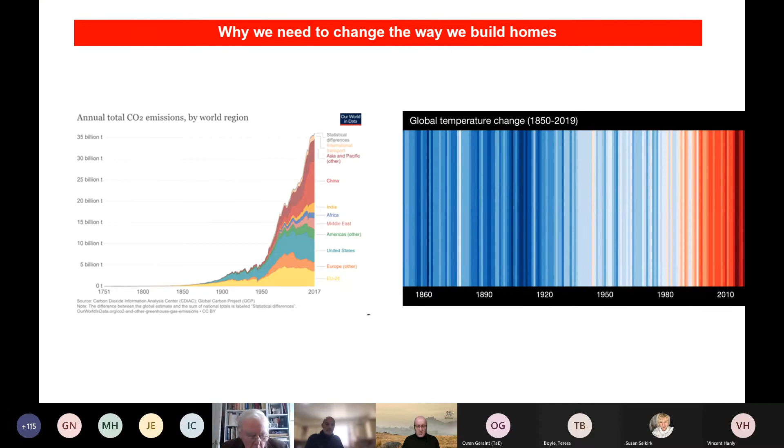So what action has the Welsh Government undertaken? To start off with, the Innovative Housing Programme has run for a number of years. Welsh Government have funded 64 schemes, resulting in the construction of just under 2,000 homes. 85% of those homes are constructed from timber, and just under 50% of them use Welsh timber.

We are about to publish new guidance on design requirements for social housing. It has been called Beautiful Homes and Spaces, though I'm not sure if that will be the final title. Within that document, we will be requiring or encouraging social landlords to account for the upfront carbon involved in construction, and encouraging them to use recycled materials.

Welsh Government also hold the purse strings in terms of grant conditions. In a short period of time, we will first encourage landlords to undertake lifetime carbon assessments of the homes they develop. Then in a few years' time, we will require social landlords to produce lifetime carbon assessments. And at some point yet to be determined, we will introduce limits on the levels of upfront carbon in construction for social housing purposes.

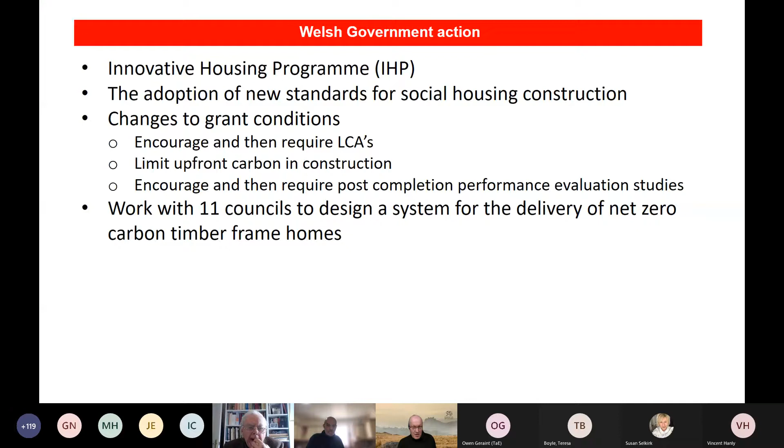I'm going to talk specifically now for the rest of this presentation about the piece of work we're running through with 11 local authorities and a small number of housing associations on the design and delivery of a system for producing net zero carbon timber framed homes. This work comes out of the Council Housing Development Forum, where the 11 councils come together to talk, share their experiences and learn.

The project builds on the work of the Homegrown Homes project, one specific element of which James will be talking about later. The proposal sees the 11 local authorities and housing associations working together to design a net zero carbon timber framed housing solution, effectively forming a buyers club to create scale of orders, and providing an opportunity for councils to upskill their DSOs to safely erect and fit out homes, or to work in partnership with locally based SMEs.

The project was supported by the 11 local authorities in October, and Powys County Council made a successful application for innovation funding to support the first stage of the project. That first stage sees the design of a short terrace of 2-bed, 4-person houses to RIBA Stage 4, along with the first iteration of a manual for the manufacture and assembly of the homes.

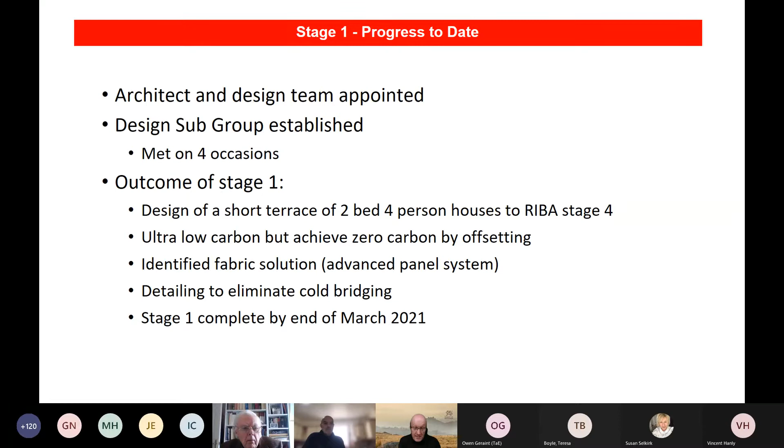This stage of the project will be completed by the end of March. And throughout this process, Rob, the lead architect, has stated we need to engage with manufacturers to ensure that what's being designed is capable of being manufactured. We hopefully address this in stage 2.

Stage 2 will see the design of additional property types that you can obviously read. So we've got 3 property types there, plus the property type currently being designed, the 2-bed, 4-person house. Those 4 property types represent somewhere in the region of just under 80% of the homes that local authorities are going to require over the next 5 years.

So we will be designing the bulk of homes that local authorities wish to develop. We also will be looking to prototype and test the build system, and that testing will focus not just on fire but on structural stability, and also the buildability of the system.

We want stage 2 to secure warranties for the build system. The local authority or the participating social landlords are yet to identify which warranties they would require.

Stage 2 will also see the whole life carbon modelling of the homes, so effectively each home will have its own EPD. And we will see in this stage the development of a manual for the manufacture and assembly of the homes, and we would want to achieve a quality assurance accreditation for that manual.

The most effective way forward, we consider, is by advertising a contract for an innovation partnership supplier, and the supplier will both be designers and manufacturers.

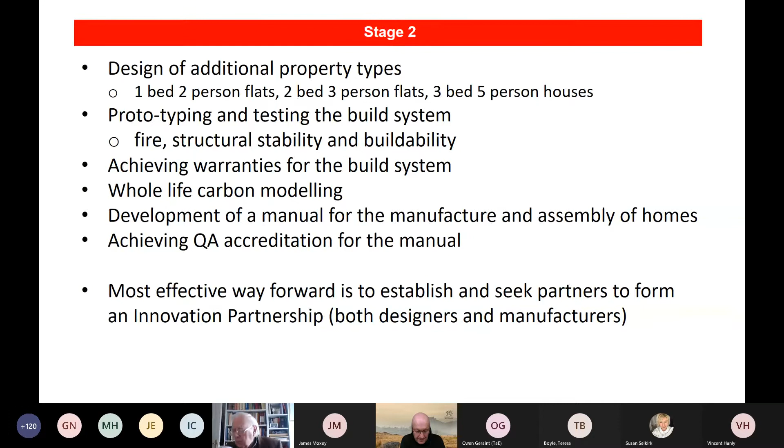So what are the next steps? We will be looking to advertise the opportunity for the Innovation Partnership on Sell to Wales in the late spring, and we're hopeful that we will appoint a supply partner in 2021, in the summer of 2021.

At the same time as the work in preparation for the letting of the Innovation Partnership is ongoing, we are working with Social Business Wales, which is part of the Wales Cooperative Centre, and with a group of timber frame manufacturers and a designer to form a consortium to hopefully bid for and win the Innovation Partnership.

We imagine that the Innovation Partnership will probably take about 12 months, but it may be slightly longer. There are a few Donald Rumsfeld unknown unknowns in relation to fire testing and also the process of securing warranties, which could make it slightly longer than a 12-month period.

But at the end of the Innovation Partnership, we would have expected local authorities and the housing associations who are participating to have identified the volume of homes that they would wish to secure via a further contract, and then look to let a 5-year contract with the manufacturers who are part of this process. Obviously, we would have to let a contract for the supply of those homes.

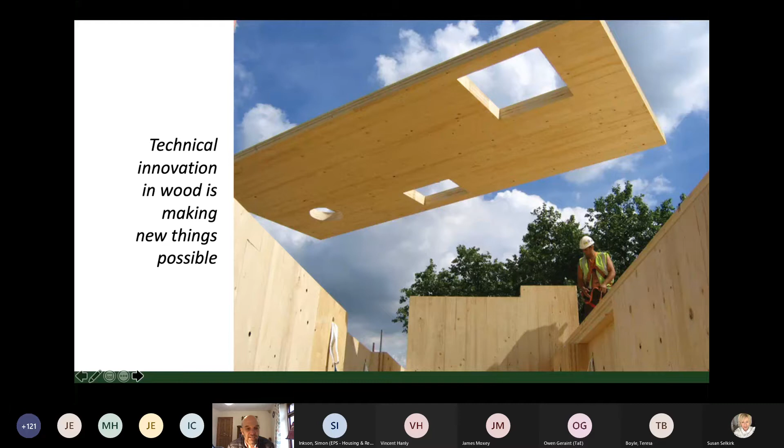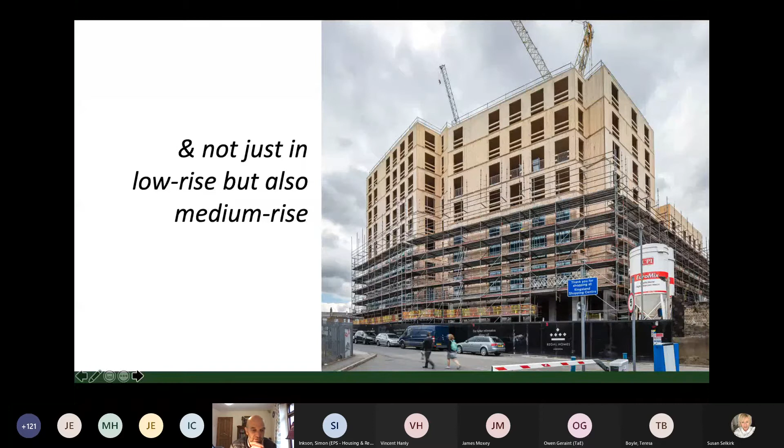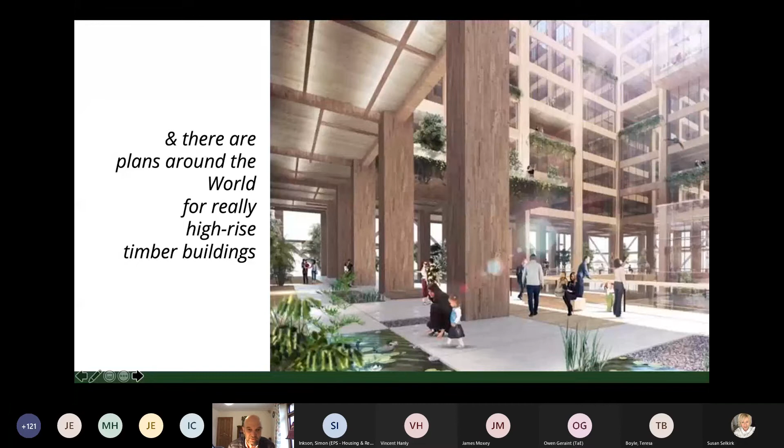The technology and innovation is moving extremely fast. This is CLT, which can be used in low rise, medium rise and high rise. This is a project in London, Dalston Lane, which was at the time the biggest use of cross-laminated timber in the world - I think that's been superseded now. You can also start dreaming of high-rise, although post-Grenfell in the UK that's a bit of a challenge at the moment, but in other countries across the world, they're looking to push the boundaries of what you can do with timber.

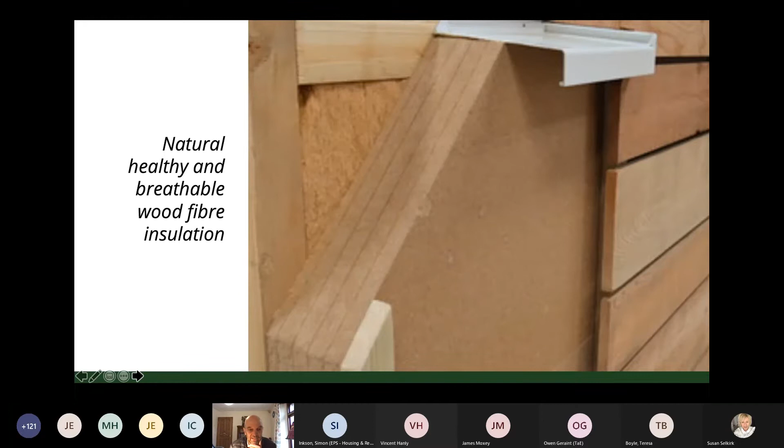There's also wood fibre insulation. After you've produced your sawn wood, the residue can be turned into insulation, and the market for wood fibre insulation has gone ballistic in recent months, given everybody's on a decarbonisation journey. It's become hard to get in the UK because we don't have UK production at the moment.

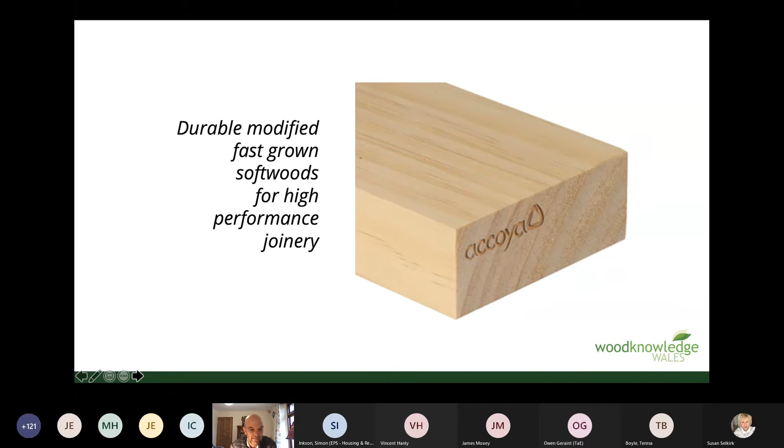And then this is Accoya, which is a fast-grown radiata pine timber, chemically modified to be hydrophobic so that it doesn't move with humidity, and therefore doors don't jam, windows don't rot. It is becoming the go-to timber for joinery in the UK and across the world.

So those are all fantastic recent innovations. So a bit about Wood Knowledge Wales.

Our vision is of Wales as a high-value forest nation, a net zero high-value forest nation. We're not really a forest nation - we're a sheep, beef and dairy nation, and not a timber nation. We're very much a steel nation culturally, so it's a challenge for us in terms of the shift.

Our mission is to support the purposeful development of Wales' forest industries from tree to product, to benefit everybody - the economy in terms of jobs, income and revenue, the environment in terms of afforestation, and of course the people of Wales.

What we do is very much knowledge creation and exchange. We do advocacy and strategic interventions, and we like to think we drive innovation through encouraging collaboration. We're a for-public-good, not-for-profit membership alliance.

These are all our fabulous members - some of you I saw on the delegate list are definitely here. We're growing at about a member a month. Companies join partly because of our value proposition, but also because they believe in the mission.

You can see there that we cover everything from the forest - organisations such as Natural Resources Wales are members - all the way through to the clients: social housing, but also private sector clients as well. So, the Homegrown Homes Project.

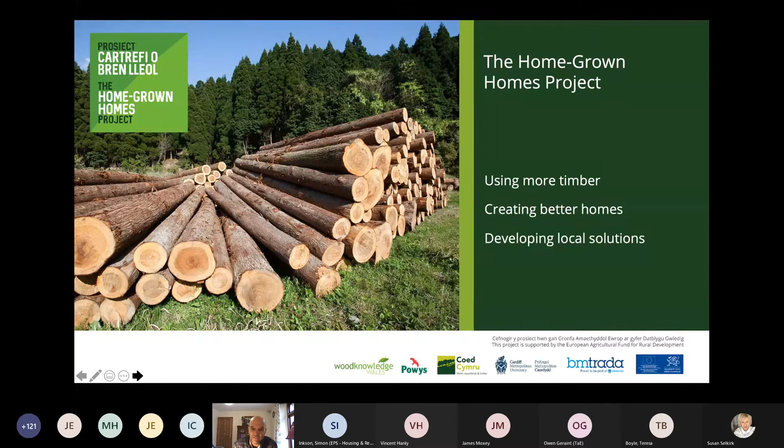But the essence of the project was to use more timber to create better, lower carbon homes, and to do that using local solutions - that's local manufacturers and local timber.

Our approach was to look at the demand side to improve the quality of Welsh homes through building performance evaluation and whole life carbon analysis; to look at the manufacturing base to improve the quality of off-site manufacturing through collaboration, greater systemisation, and application of low carbon standards; and to improve the case for expanding Welsh forestry through stimulation of construction timber demand and supply. So those were the three core themes.

We did that through applied research, exemplar projects - very much working hand in hand with social housing providers - and the IHP came at a perfect time for that.

And then knowledge exchange events - we're running events all the time. If you check our website, you'll see we're doing quite a lot of training on embodied carbon, whole life carbon, and building performance at the moment through our Forest Nation programme of events.

So I suppose this graphic and concept came towards the end of our research, which brought together all the outputs into one sort of communicable place, I suppose.

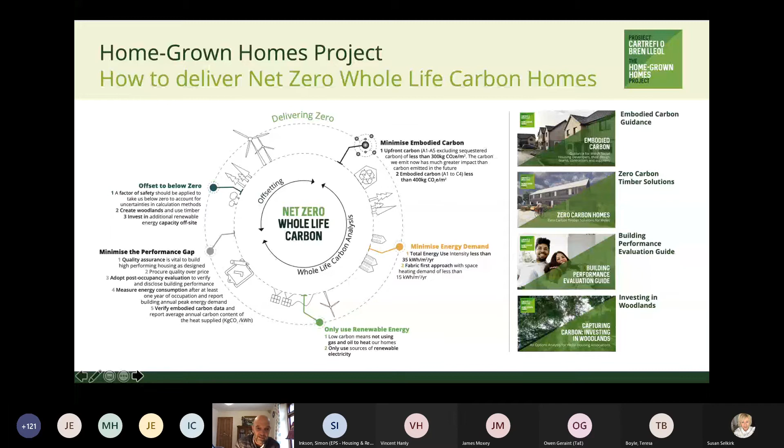So 3 key guidance documents that we produce as part of the Homegrown Homes project are our embodied carbon guidance, the building performance guidance, and guidance on how you make the right choices with timber frame. And that was very much drawn upon the experience of Trada over many, many years and their QMark knowledge in terms of going out and looking at what didn't quite work on a timber frame project.

Because we also found that clients didn't perceive timber frame as being always the cheapest option. And it should be the lowest cost option, but things don't always pan out as planned. So we think that guidance is really, really important as well.

So in terms of the embodied carbon guidance, the purpose of it is to increase the knowledge of embodied carbon and how to reduce it. It's written for development and asset managers, design teams, contractors and suppliers. It's designed to help you procure and carry out embodied carbon assessments. It's got benchmarking and tools and examples and signposting.

So we launched that last week in one of our events, and we've got 2 more training events coming up. So I would commend those to you.

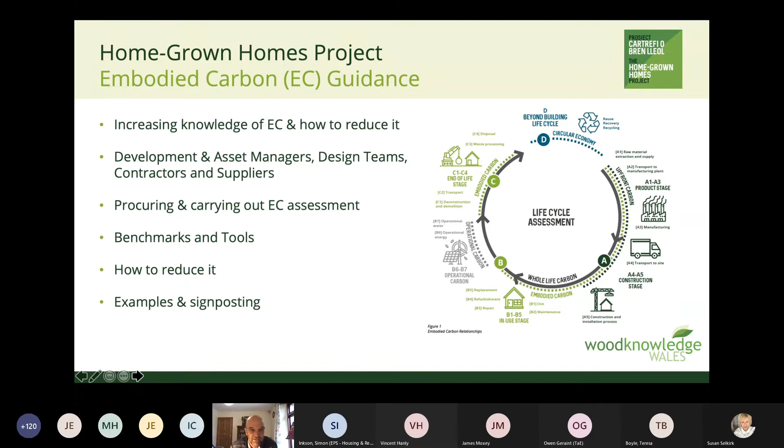Building performance evaluation guidance is a little bit different. It allows you to create a client specification sheet up front, which sets out what targets you're trying to achieve. And then it holds your hand through the process of design, construction and post-completion performance as to what methods are most appropriate and how to go about it.

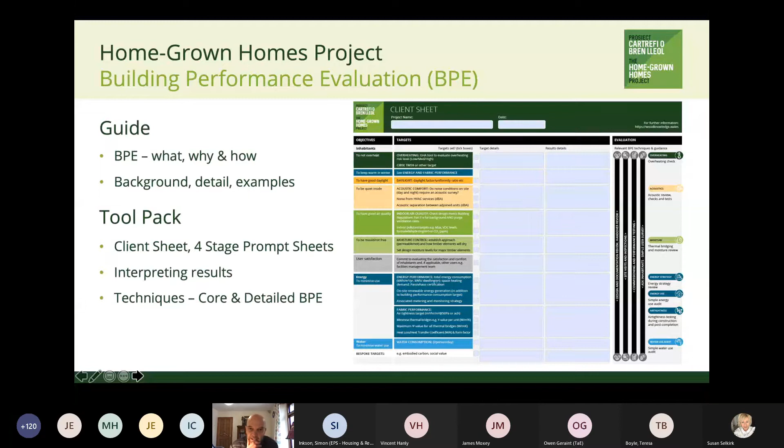And within that guidance, it's got a tool pack with prompt sheets and which techniques you should consider are sort of more fundamental, the core techniques, and which are maybe more expensive and require specialists. Most of the techniques can be carried out by your design team.

So then there's the, as I mentioned earlier, the making the right choices guidance. All these are available on our website if you go to the Homegrown Homes page. It's about how to make sure that your design aspirations are delivered using timber frame and how to avoid common mistakes, because building a timber frame home is not the same as building a brick and block home.

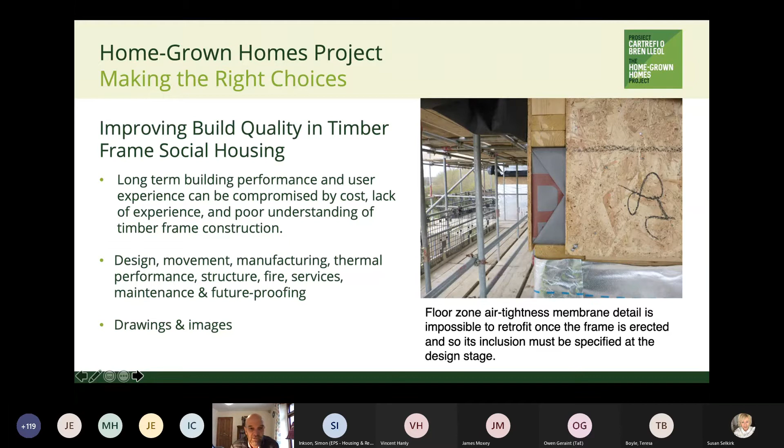So then we've also recently launched guidance on timber cladding, wood windows, and soon to come on wood fibre insulation.

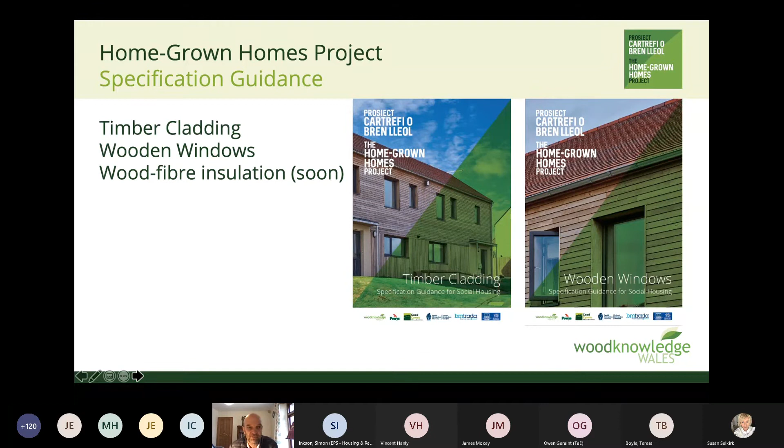We've also provided details on how you might go about, particularly as a housing association, investing in woodland as a means of achieving net zero. And we think that housing association partners are almost a near perfect investor in Welsh forestry.

Forestry is an attractive investment to pension funds and high wealth individuals, and they are buying land in Wales now. We would rather see it go to housing associations, or rather we'd rather see farmers stay on the land and be incentivized to grow trees. But we also see there's a critical role for housing associations in that.

And you can also see here we're working on the carbon storage contract, and we're trying to pilot the selling of biogenic carbon as an offset in timber-based housing systems, and we've got some details about that on the website.

We're also very much working on the policy sphere, and we launched our 5 essential strategies for an emerging forest nation a few months back, and we sent it to all the political parties. We're hoping to get into manifestos.

That has 5 key elements. One is the whole life carbon reduction standards. We want to see great ambition from Welsh Government, and I think Simon has indicated that that is absolutely coming. Of course, if we don't incentivize and support and attract manufacturing, all the products that demand will stimulate will be imported, and that's the case at the moment. So we want to see a really proactive establishment of timber manufacturing facilities, that's timber windows, wood fibre insulation, glulam, all those kinds of products.

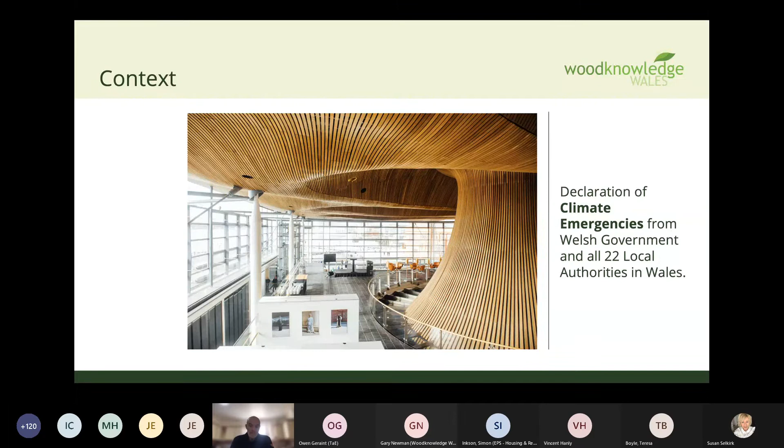So our brief was to develop a net zero whole life build solution, something that definitely didn't require 373 kilowatt hours per meter squared, much less.

Importantly, we weren't planning on developing something radically new. Our aim was to work with the supply chain, reflect on the build systems that the timber frame supply chain use, and then see if we needed to evolve these, driven by some clear priorities. And those were to reduce energy need, reduce embodied carbon, remove the use of fossil fuels, and reduce the performance gap. Do all of those things before considering offsetting.

So when we've done our best to achieve those, offsetting is a way of compensating to complete the journey to zero. But what does that mean? It means accepting that carbon is always going to be emitted when we build, but reaching zero means that the net amount of CO2 that is emitted from design through to demolition of a building is zero, because we've taken measures, and we believe these measures are to capture and store carbon.

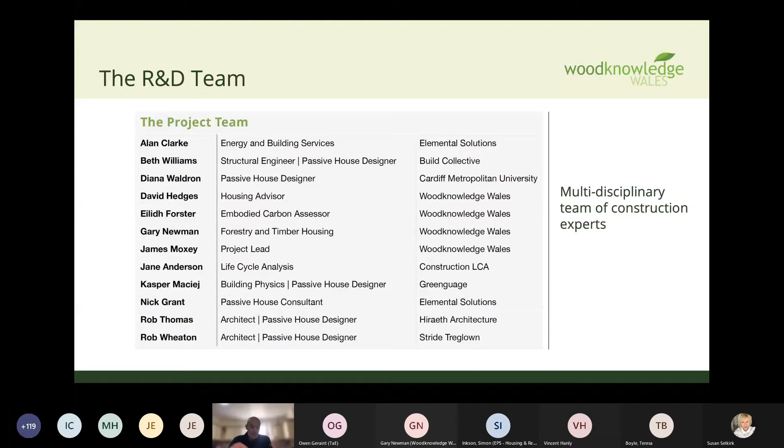I know we shouldn't single people out, but I'm afraid on this occasion I'm going to. Rob Thomas is a truly inspirational member of the team who wrote most of the report that underpins this presentation today, and you can download the report from our website. I had the pleasure of spending many hours debating, discussing, interpreting, learning with Rob. Even though we had frustrations along the way, we continued with a sense of determination and positivity. It continues to be a pleasure to work with Rob and his team at Hiraeth Architecture, who Simon has mentioned. We're working on the innovative housing programme at the moment with Rob.

So it's always good to have a research framework within which to respond when you're undertaking a piece of research. We were very lucky that at the time the UK Green Building Council had developed their net zero framework, and I'd argue that this still provides the agenda that's steering other organisations, such as the Royal Institute of British Architects, who subsequently set some very challenging targets for us all to think about, particularly in terms of operational energy and embodied carbon. So you can see those targets there for 2025 and 2030.

For 2030, the target is a total energy use, or operational energy, of less than 35 kilowatt hours per meter squared per year.

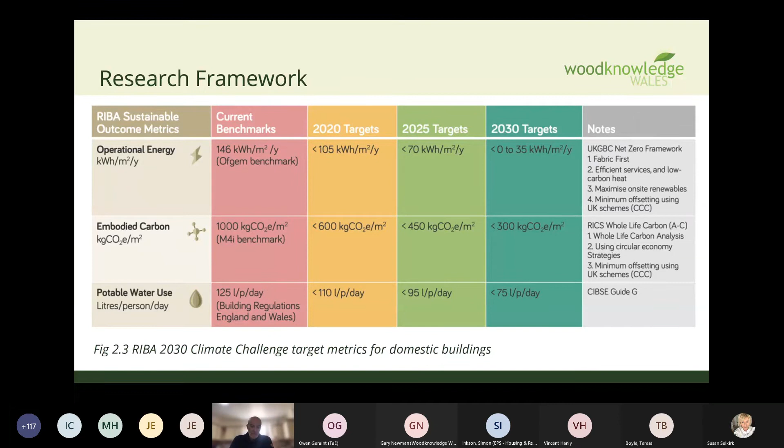As Gary said, I won't go into too much detail on this, but we developed our net zero framework, which again became a guide for us. In terms of developing the design work, we focused on embodied carbon, energy demand, and offsetting to below zero. We did look at the other two areas, but we focused on those three.

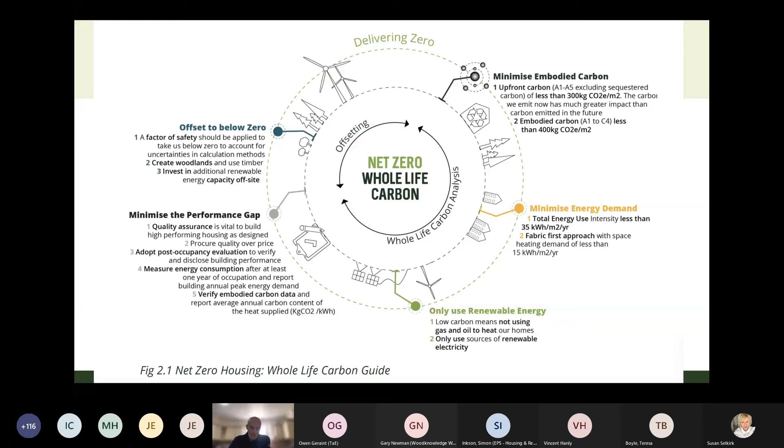And we need to consider total CO2 emissions. As you can see from this diagram, 50% of carbon emissions take place before the first occupier of a home is handed their keys.

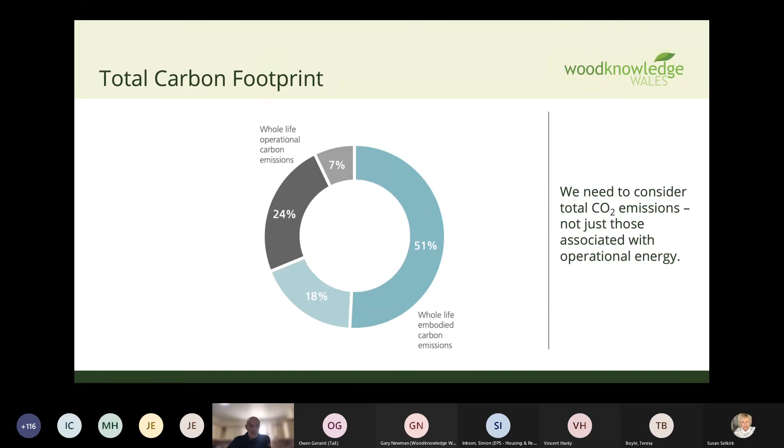So in terms of what we did, I'm going to focus on those three principles of the zero carbon framework. We adopted a fabric first approach, which meant getting to grips with embodied carbon analysis. There are a number of tools that can be used to do this, and as Gary said, you can download the guidance from our website on how to do embodied carbon analysis. We're also running a series of workshops currently, so you can sign up for those on our events page.

For this project, we used Ecolab, which was developed by Archetype and their partners. It's not an easy process doing the embodied carbon analysis, but it's doable. It did allow us to model the carbon impact of different components, different materials, different fabric assemblies.

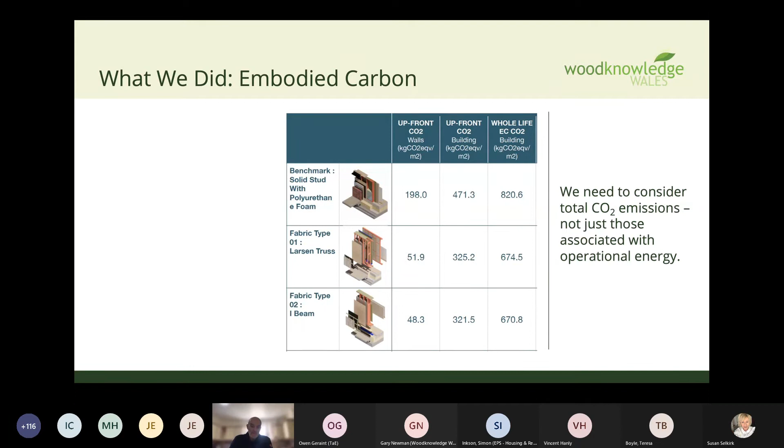We developed 5 timber frame solutions and compared these to a benchmark. At the top you'll see the benchmark, which is filled with polyurethane foam insulation, and below that we have 2 of the fabrics that we developed alongside our timber frame partners. The upfront CO2 emissions of the 5 that we developed, we're only showing 2 here, the 2 below, are 25% that of the benchmark. And we made a very conscious decision to massively reduce the amount of petrochemical materials that we're going to use in our designs.

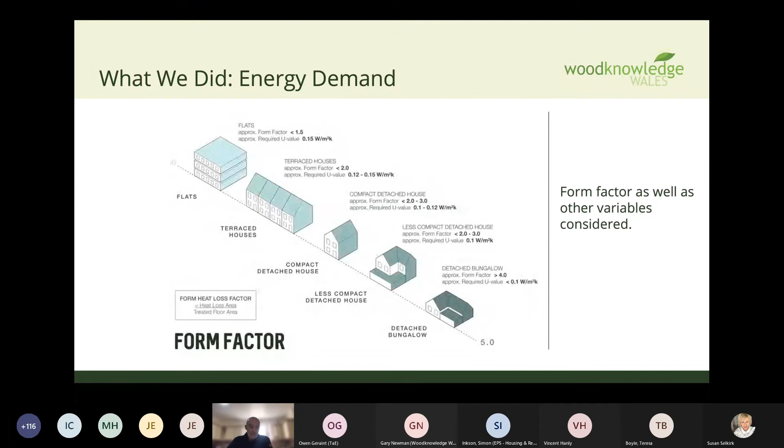We then looked at a typical 2-bed, 4-person housing association house type and reconsidered it in various different orientations and footprints. What you see here ranges from the traditional floor plan on the left to the right, which is a reconsidered townhouse style. We reconsidered these with different variables, including solar gain.

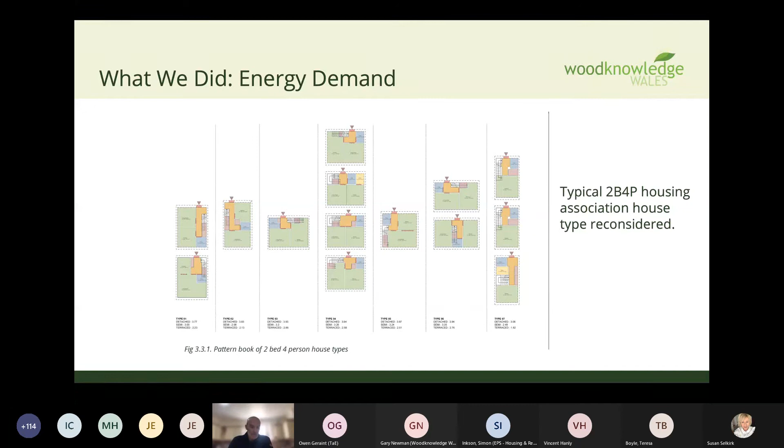This is a model of the townhouse, a 3-floor townhouse option, which is now what we're taking forward into the IHP4 project that Simon mentioned, with 11 local authorities and some housing associations.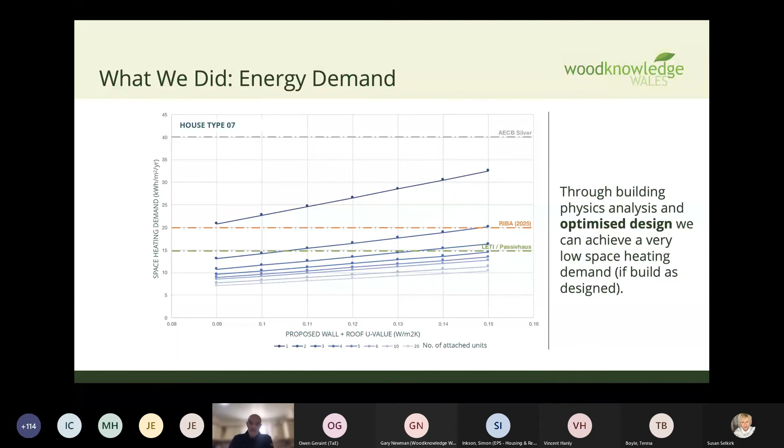And the woodland, as Gary said as well, would cost between 1% and 2% in terms of establishing the woodland, planting, establishment and management. It's something the housing associations are very interested in, not just for its role in offsetting and capturing carbon, but also for the other benefits that a woodland would bring to a local community.

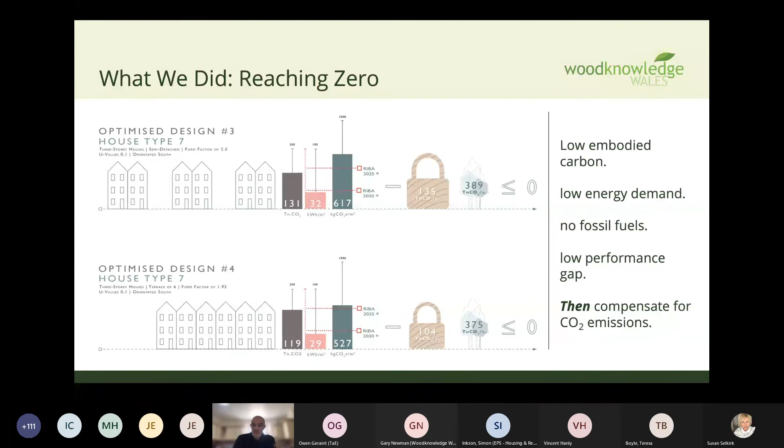So the exciting news is, yes, we're taking this forward through an IHP fund with 11 local authorities, and the aim is to develop a draft technical manual for a mid-terrace townhouse. We'll be publishing the results as soon as possible. Thanks very much.